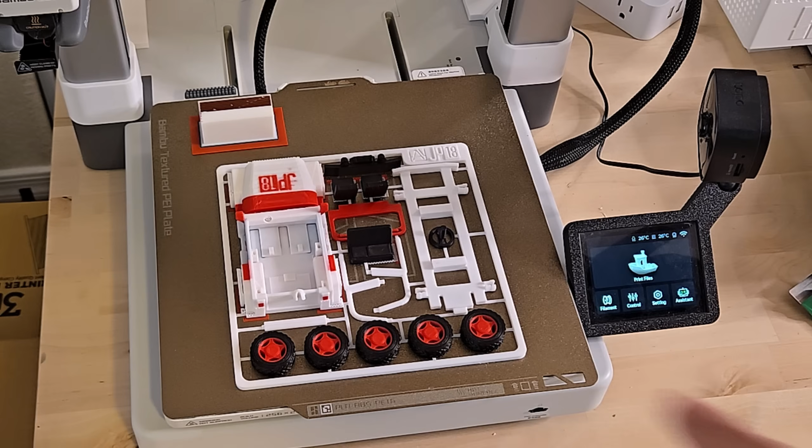My name is Nick, and today we're diving into one of the most exciting aspects of 3D printing: painting your 3D models. Imagine taking your prints to the next level with stunning multicolor designs while uncovering tips and tricks that most tutorials don't even touch on.

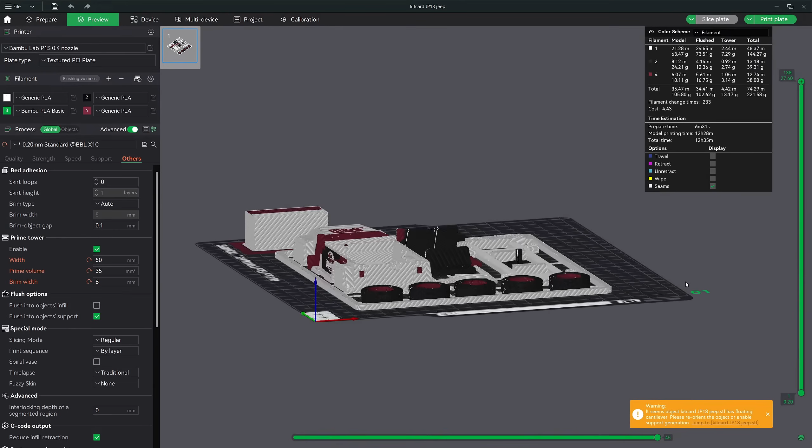This isn't just another tutorial, it's your gateway to mastering the art of 3D painting. I'll guide you step by step from setting up your AMS and syncing your filaments in Bambu Studio to mastering every single painting tool. We'll dive deep into the essentials like prime towers and flushing volumes, exploring how they work together to make more efficient prints. And to wrap it all up, I'll show you how to bring it all to life with a fully painted Jurassic Park Jeep. Whether you're a beginner or looking to sharpen your skills, this video is packed with everything you need to elevate your 3D printing game. So grab a cold one and let's jump in and start painting your next masterpiece.

On the left side of Bambu Studio, you'll find the filament menu. This is your go-to for managing filament. You can add or remove colors, change filament types, and sync AMS colors with Bambu Studio.

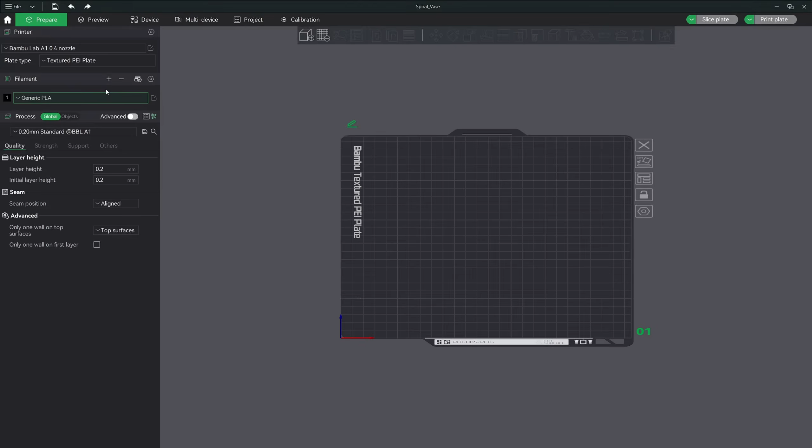Before we dive into this tutorial, let's get the filament loaded into the AMS Lite. For this tutorial, I'm using PLA filaments—they're beginner-friendly and super easy to work with. That said, the AMS can handle other types of filament like PETG and ABS, so you've got plenty of flexibility. But to keep things simple, let's stick with PLA today.

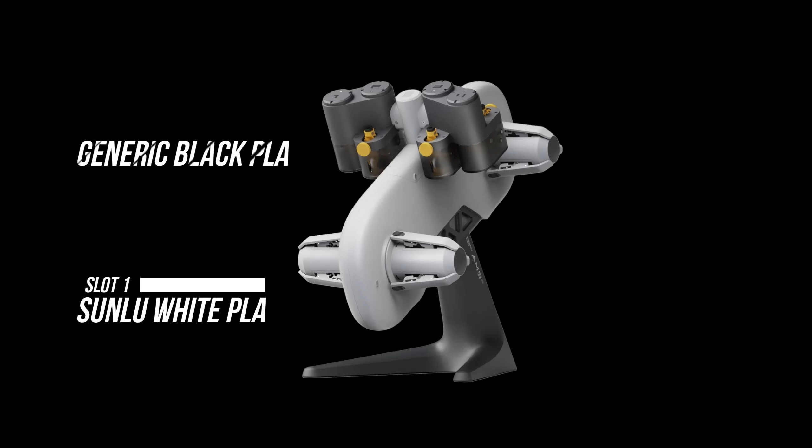Here's what I've loaded into my AMS Lite: Sunlu white PLA, a small generic black spool of PLA, Bambu Lab green PLA, and Sunlu red PLA with the new spool style.

Here's a quick tip: not all spools fit perfectly onto the AMS. For instance, this old Sunlu spool has a different hole size. That's where these spool adapters come in handy—they're easy to print and ensure that the spools fit snugly on the rollers. I'll include a link below so you can print your own.

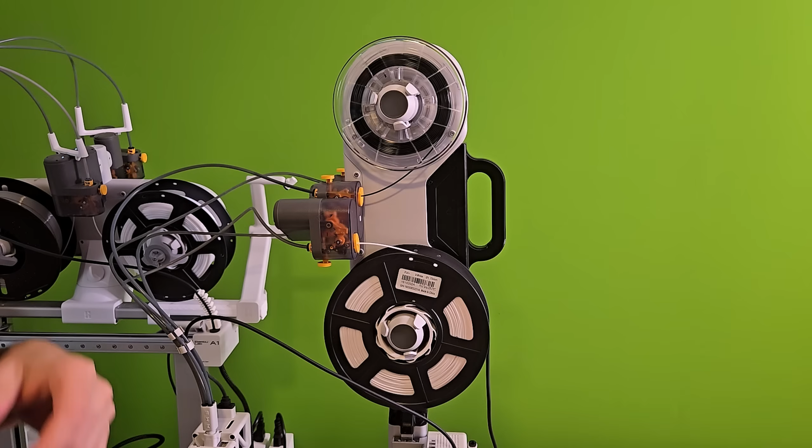Speaking of spools, did you notice the small black PLA I mentioned earlier? Even smaller spools can work with the AMS as long as they fit securely.

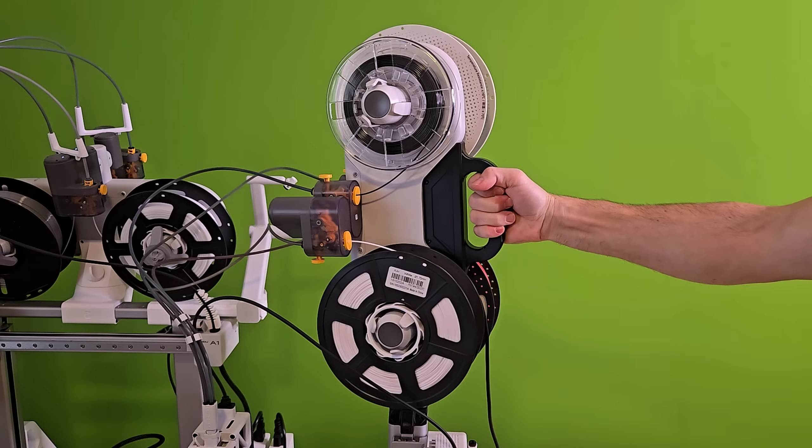Once all the filaments are loaded and properly fed into the AMS, it's time to return to Bambu Studio and set up our filament colors. I'll walk you through matching your filament slots, syncing them with Bambu Studio, and prepping for a flawless multicolor print.

Once we're back in Bambu Studio, let's switch over to the Device tab where we can set up our filaments with the AMS. Over here on the right hand side is where we can manage all of that. Depending on if you have an AMS or an AMS Lite, it will display the colors four across, or for the Lite, it will display them in a 2x2 grid. It also has the extra spool option in case you have that set up.

Now the colors that are set up currently do not match what I just loaded into the AMS, except for the Bambu Lab green PLA. This is because all Bambu Lab filaments have an RFID tag. You can see that the correct color has been loaded, and it displays an eye icon rather than an edit icon, indicating the filament has been recognized by the RFID. You can click on that icon and a pop-up will display the filament name, color, temp, and serial number, making the process for Bambu Lab filaments a much more streamlined experience. Let's move forward and properly set up the rest of our AMS filaments now.

Slot 1 is right here, labeled A1 with a circle icon around it. You can click on that, and if you have Bambu filament loaded but not recognized by the AMS, it will automatically detect the filament information for you. Since we are not using Bambu filament for this slot, we need to manually edit it. Click the little edit icon for slot number 1, and the filament window will pop up. This time we need to manually add our filament information. If you happen to calibrate all of your filaments with your AMS, you should be able to select them from the drop-down menu here.

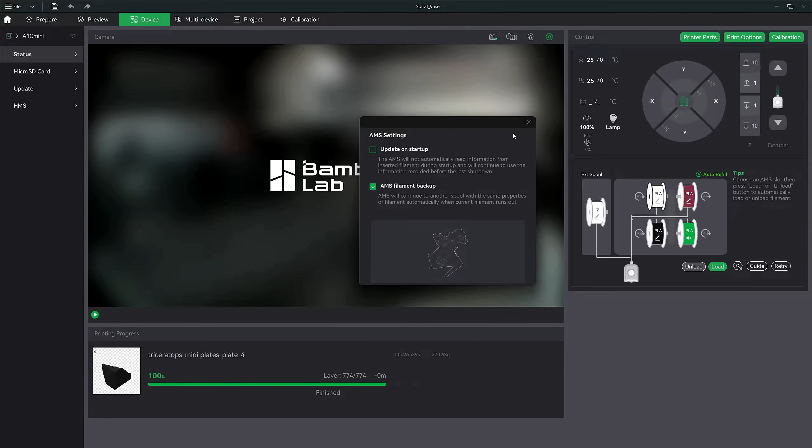Next up is the guide button, which takes you directly to the Bambu wiki page for the AMS. If you're new to the AMS and you want to deep dive into the features, I recommend giving it a quick read when you have time. It's a solid resource. The retry button functions the same as the one on your printer screen during filament loading. If the filament doesn't successfully push through the extruder on the first attempt, you can hit the retry button to give it another shot and force the AMS to push more filament through.

Now that we've covered all the AMS functionality, let's head back to the Prepare tab to finish setting up our filaments. When you click the filament drop-down menu in the Prepare tab, you should now see a new section labeled AMS Filament at the top. This section displays all 4 of our colors with their corresponding A1 through A4 icons from the AMS.

Next, we need to add our filaments to the project, and there are 2 ways to do this. First, you can use this icon button right here, and if you click it, a pop-up will show. Then hit Resync. It will sync these new filaments that you just set up in the Device tab and add them to the filament list.

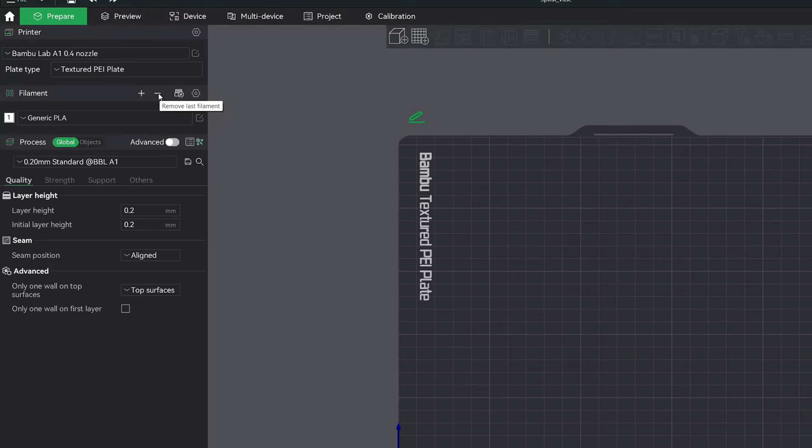The manual way of doing this is if you click the plus button here, you can manually add your loaded filaments by using the drop-down menu and manually selecting a filament. Let me remove the synced filaments first. Now, if I manually add 4 filaments to our project, I can go into each one and select our AMS filaments for each.

Next, let's dive into adjusting filament settings. To do this, click the edit icon right here. A new window will pop up, giving you a variety of options that you can manually adjust for the specific filament. If you have the advanced mode turned on, you'll notice that there's more settings that appear.

Let's quickly turn it on to take a look. As you can see, the advanced mode reveals a lot more customization options. However, for this tutorial, we'll leave the advanced mode turned off. It's not necessary for what we're doing today.

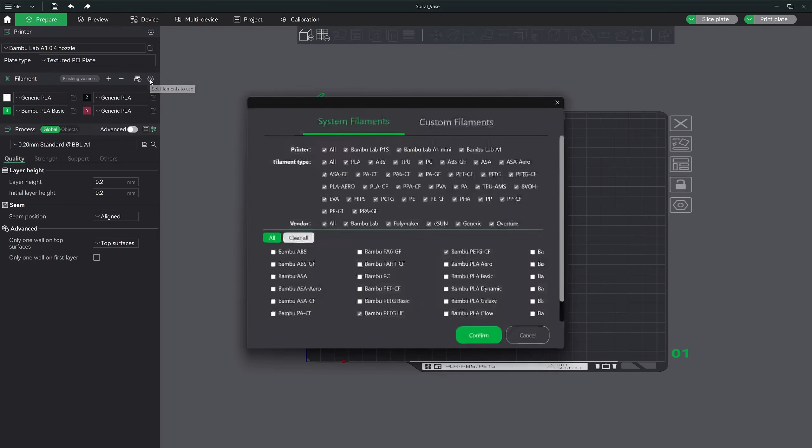Before we move on to the fun stuff, let's touch on the last feature in the filament menu. If you click this gear icon, it will pop up a menu where you can add filament templates built into Bambu Studio. While not every brand is included, you'll find all of Bambu's filaments and many Polymaker filaments available to add here. For now, let's cancel and go back.

Now that we've covered everything, let's go ahead and paint our first model. I went ahead and opened up a few models so that we can go over each of the painting tool features. For our first model, I wanted to dive straight into the fun stuff. We will be painting a JP18 Jurassic Park Jeep. If you've been a longtime supporter of my channel, you know I love printing dinosaur skulls. So I thought this fits the project perfectly.

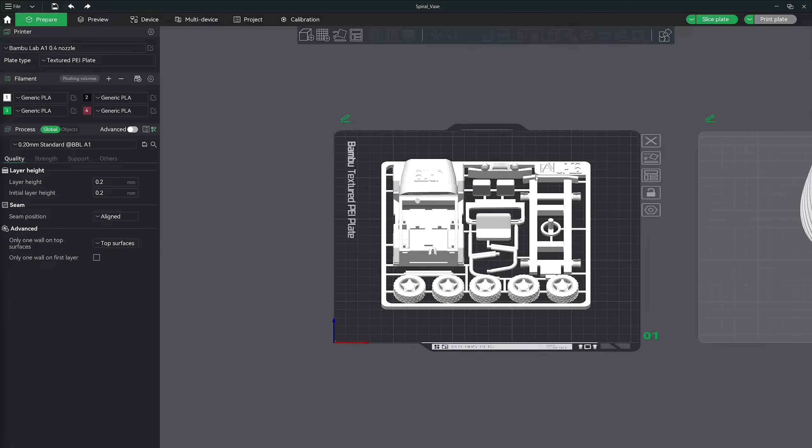To activate the paint tool, you first need to select the model you want to paint. Then you'll notice the toolbar at the top will highlight. This means that you can now use the tools with the currently selected model. Let's go ahead and open the paint tool by selecting this icon here or by pressing N on the keyboard. Once you click on the paint tool, you'll notice everything else in the main window disappeared.

This is because Bambu Studio went into isolation mode. This makes it possible to work with the current model without having other models obstruct your view. Up here at the top, you can see our 4 loaded filaments. To get started painting, you first need to select the color you want to work with. It's like picking your paint with your brush.

You can either use the mouse and select a filament by clicking on it, or by using the number on the keyboard that represents the color. So if I wanted to pick red, all I have to do is hit 4 on the keyboard and it switches. Next are all the different types of painting tools. Each tool works differently from one another.

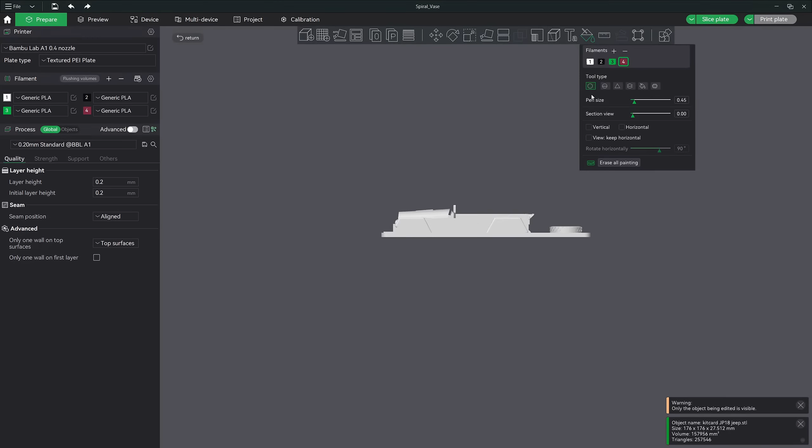First, let me change my view to the side by pressing Ctrl 5. Then I'll zoom in and angle my camera. The 6 painting tools are the circle, sphere, triangle, height range, fill, and gap fill. The circle and sphere both work similarly. The pen size controls how big of a brushstroke you want to make.

You can use the slider widget to adjust it, or if you hold down the Control key and scroll the mouse wheel, you can adjust the pen size without having to use the slider. This is a great time saver if you're making intricate painting adjustments.

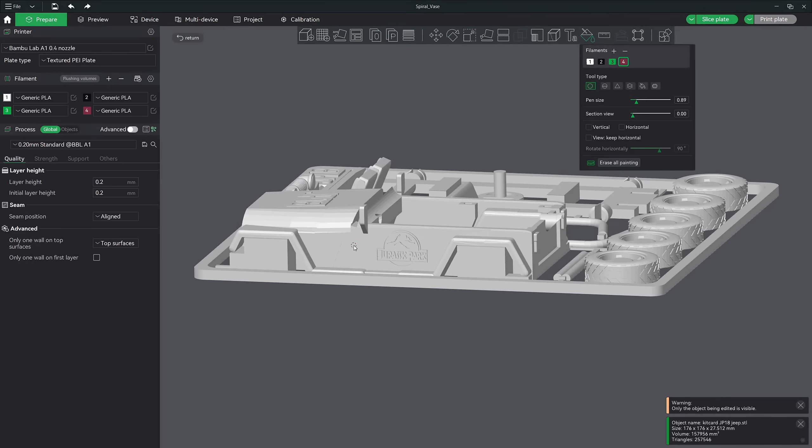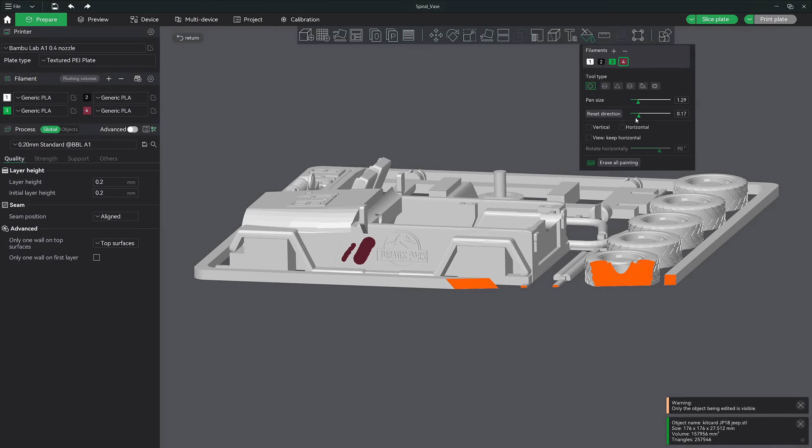The section view allows you to hide sections of your model for more detailed painting. If you're not able to get a good view of what you want to paint, simply adjust the section view to hide parts of your model. This tool also has a slider widget that controls it, but if you want the shortcut for this tool, simply hold down the Alt key on the keyboard and adjust with your mouse wheel.

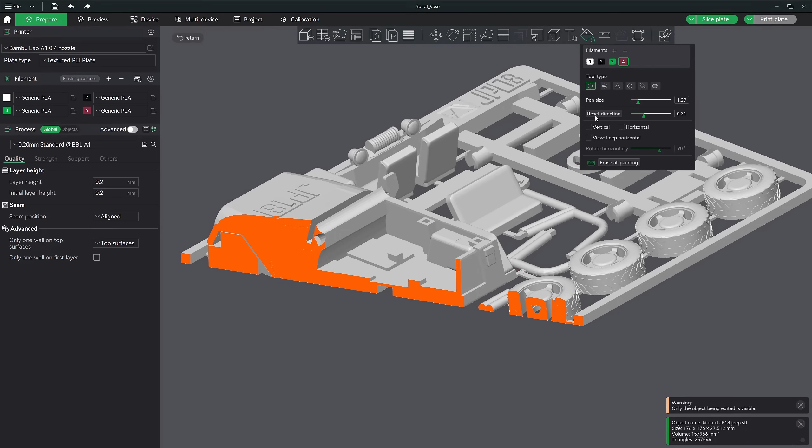Now you'll notice after you adjust the section view, it will change to a button that says Reset Direction. The way the section view works is it will start to remove the model from the direction of the view of the camera. So if you move the camera, it will still continue to remove the model from the same angle. If you hit the Reset Direction button, now it will change the angle at which the model gets removed.

Just below the Reset Direction are the vertical and horizontal checkboxes. This will lock the paint tool to only paint in those specific directions. If you want to paint a horizontal line on your model, check this box, and now if you paint, you can see my line is making a completely straight line on the horizontal axis.

The same goes for the vertical. If I check that box, now the paint tool will only paint in the vertical direction. Again, this is all relevant to the camera view. So if you want this to apply in the correct direction, then check the Keep Horizontal checkbox.

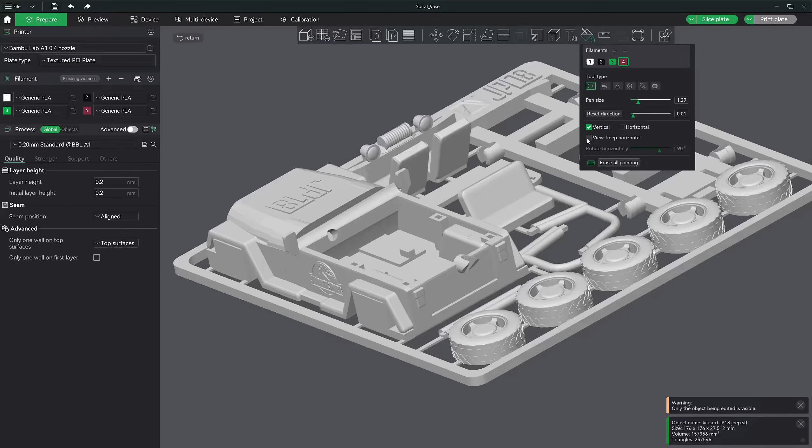I'll admit, I rarely use these tools on my models. I don't own a proper tablet or a digital pen tool to make this kind of painting fun. Using a mouse to paint isn't the best, of course. I'm sure there are amazing artists with pen tablets that would enjoy freehand painting on models though. Last in the menu is Erase All Painting, and that just removes any paint that's been applied to your model.

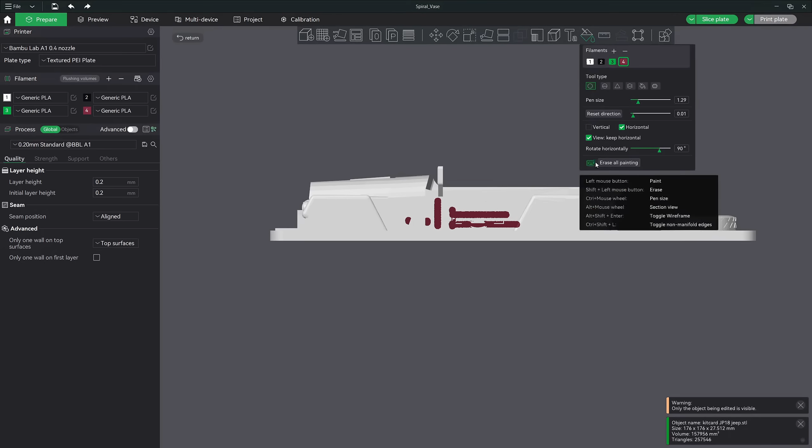The sphere tool almost works exactly the same way as the circle tool, except it paints in a 3D area instead of a flat surface area like the circle tool. All the settings work just the same as the circle tool.

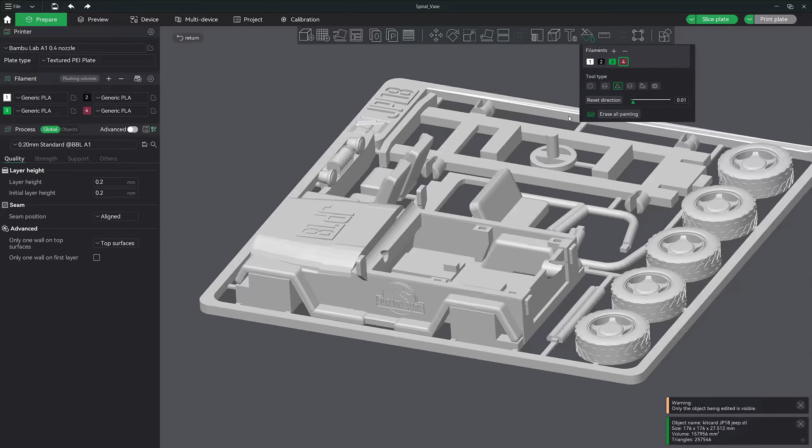The triangle tool finds triangle surface geometry that your model is designed from. It allows you to paint those individually. If we take a look at the side of the Jeep, for example, all of the triangles that make up this side will highlight and you can paint them individually. See how I was able to paint the entire door pretty quickly?

This tool can come in handy when you need more flexibility for painting a section of your model, and the fill tool isn't allowing this. This will make more sense in a minute. Next, let's skip over the height range tool and select the fill tool. Both the triangle tool and the fill tool work very similarly. When painting a model, you'll use the fill tool more than any other tools.

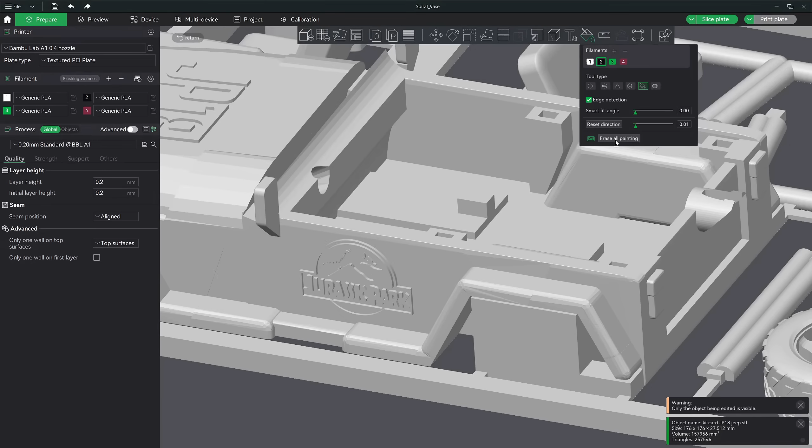Now, if I erase all the painting on the model, I'll show you how powerful this tool is. With one click, I was able to fill the entire door. Now, can you see the difference between the fill tool and the triangle tool? The triangle tool can accomplish the same task, but with a little more control. However, the fill tool has the ability to adjust its fill control. Let's go ahead and skip over the edge detection checkbox for a minute.

The Smart Fill angle slider can be adjusted using the slider widget with your mouse. The shortcut for it is Control on the keyboard and the mouse wheel. What the Smart Fill angle slider does is it allows your fill to fill in more than just one section at a time. It will begin to start highlighting adjacent surfaces that are connected to the surface of your model.

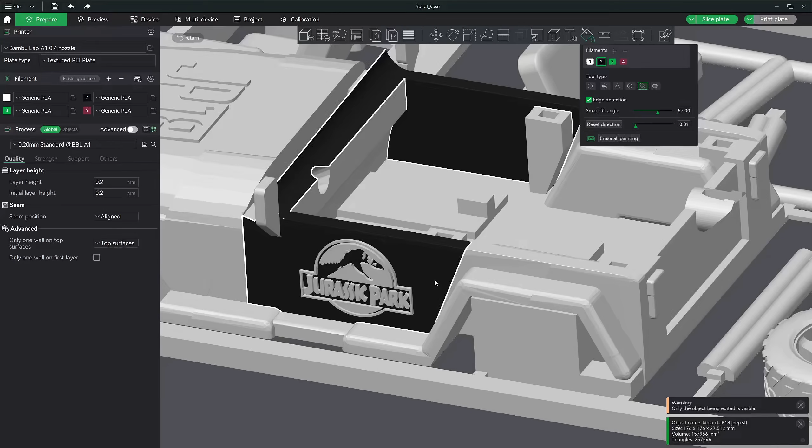As you can see, if I adjust the Smart Fill to say 57 and then click on the door again, it now paints the entire door, the dash, and the door on the other side of the Jeep. This is how we can get more flexibility and control over our fills. Remember, the lower the Smart Fill angle, the more control you have over your fill. The higher the number, the less control. This is why I use the fill tool more than any other tool.

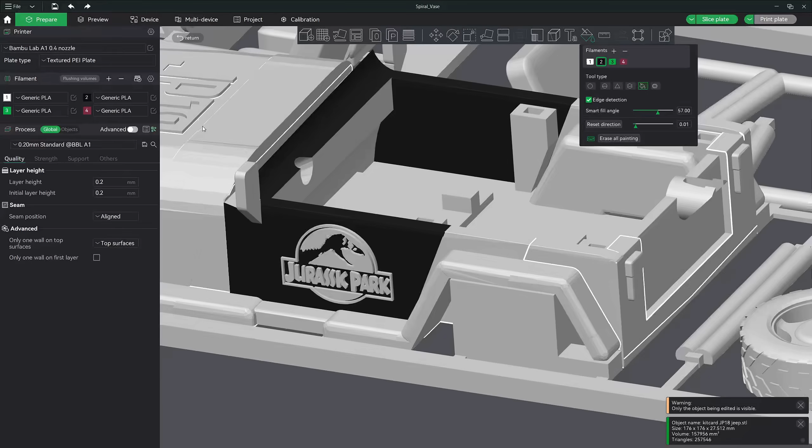Now going back to the edge detection checkbox, this tool will identify hard edges on your surface models by highlighting its boundaries. As you can see, if I uncheck this and paint, much larger sections of the model get painted. You also no longer see the edges of your surfaces highlight. This is great if you want to paint an entire section of your model a specific color without having to click on individual surfaces.

Here's a tip. When painting with this feature, you can fill in a specific section of the model, then surfaces that are surrounded by your fill can be painted completely by turning off edge detection. This is because paint won't apply over already painted surfaces. It uses the already painted area as a border.

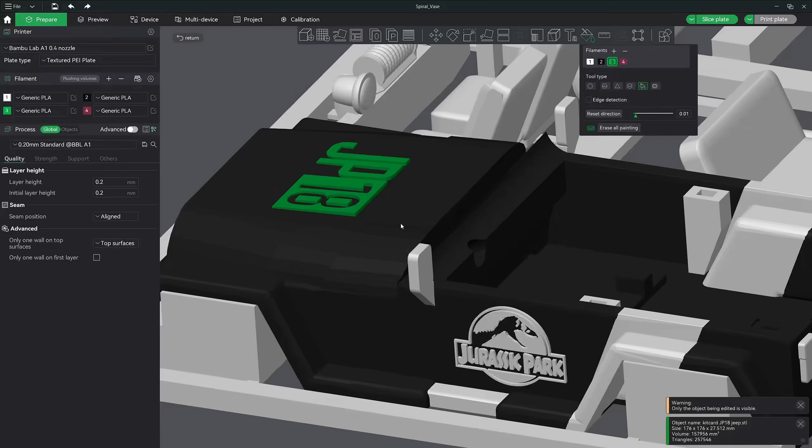The height range tool is not going to work very well for the Jeep model, so that's why I have this vase model here. Let's go ahead and switch over to that now. Select a vase and open up the paint tool and select the height range tool. If I zoom in and adjust our height range,

you can see that the horizontal lines are much farther apart. What this tool does is paint a horizontal line all the way around your model. So if we wanted to paint a few different colored sections of our vase, it would look like this.

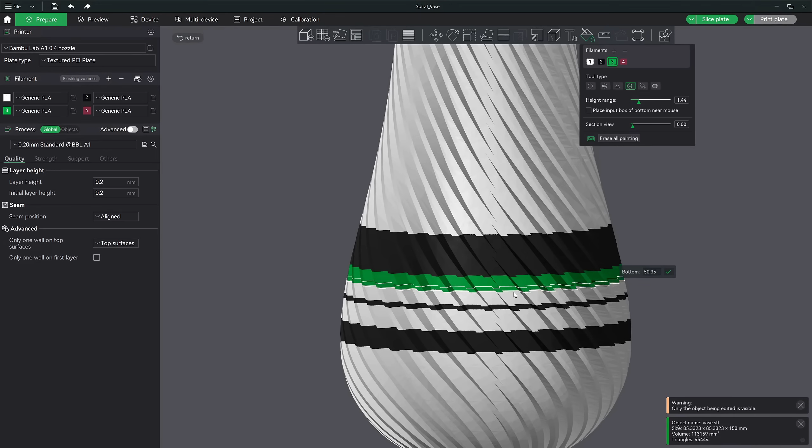Now obviously you will never paint your vase like this because it's just ugly. But you can see how this tool could be very useful if you wanted to paint a horizontal section in a specific color. This tool is perfect for that job.

The feature Place Input Box of Bottom Near Mouse will move the pop-up box that indicates how far from the bottom of the model near the mouse. This allows you to use the input height and manually type in how high up you want the height range to paint a line. Type your value and click on the green checkbox to paint. If you have issues with the pop-up position, drag your mouse from below the model and up and it will reset it near the mouse.

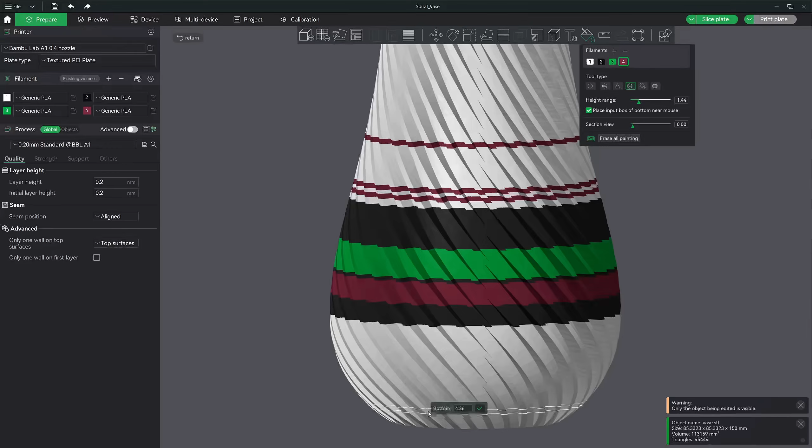There may come a time when you're using the fill tool and you're unable to fill an area between the model, causing a gap in your colors. This is going to cause you additional filament changes and waste. What the gap fill tool does is allow you to fill in those spaces between the two colors, eliminating the color changes. I painted the front portion of the hood and the fender with the fill tool to demonstrate this.

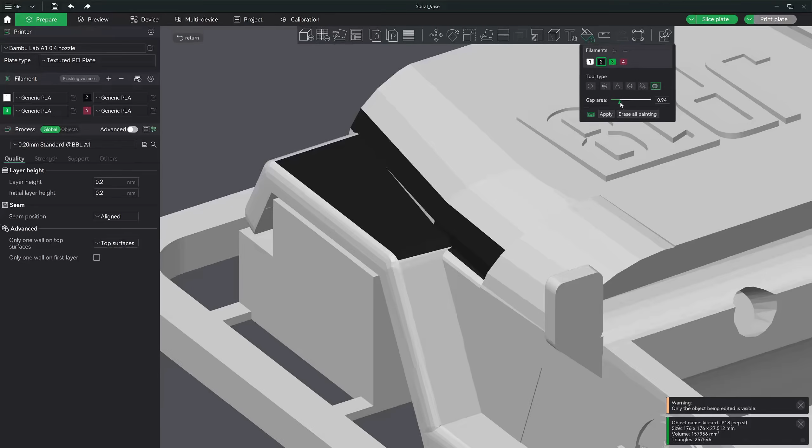You can see the small sliver of triangle was missed, giving us a gap in color. If I use the gap tool and move the slider, you can see it fills the gap for me. There are many other examples of this, but I think you're now aware of what it accomplishes. Alright, I think I've covered all the paint tools and different uses for each of them. Let's go ahead and dive into everything about prime towers and flushing volumes.

Let's quickly go over the flushing volume since we skipped over it earlier. The settings are located in the filament menu right here. When your printer switches from one filament to another, it needs to clean out the nozzle to prevent any leftover filament from mixing into the next layer. This cleaning process is called flushing, and the amount of filament used during the process is known as the flushing volume. Flushing volume is all about balance.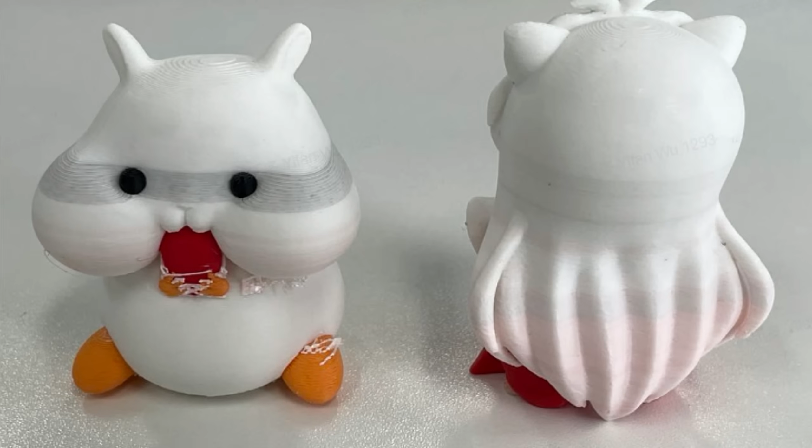If the volume is too low, remnants from a previous filament can contaminate the next layer, causing color bleeding or material issues. On the other hand, if the flushing volume is too high, you're wasting filament and increasing your print time unnecessarily. That's why getting it just right is so important. Bambu Studio automatically calculates these necessary flushing volumes based on the filaments you're using. For example, if you're switching from a dark color to a light one, the software will increase the flushing volume to ensure a clean transition.

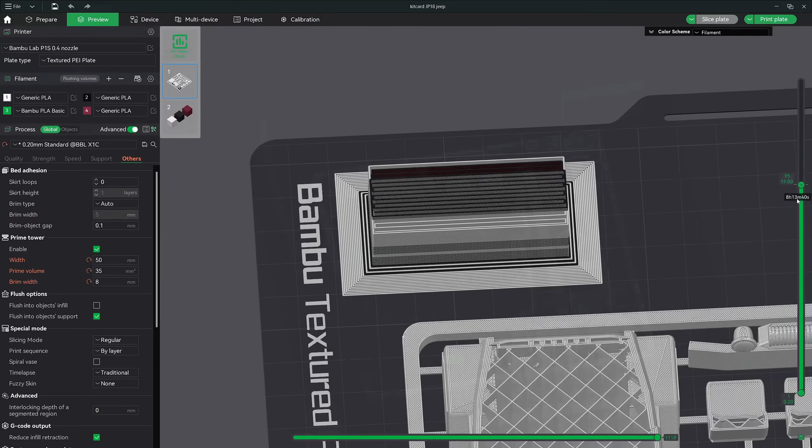The flushing volumes directly correlate with the prime towers in Bambu Studio. As a printer transitions between colors or materials, the prime tower is where the flushing takes place to ensure your model remains clean and precise. The flushing algorithm in Bambu Studio has been improved significantly over the last year, reducing waste while maintaining excellent color transitions. While you can manually adjust the flushing volumes for individual colors or all colors at once using the multiplier field, it's rarely needed thanks to Bambu Studio's advanced and effective calculations. This makes multicolor 3D printing not only accurate but also more cost-effective, and very easy and simple for non-technical users.

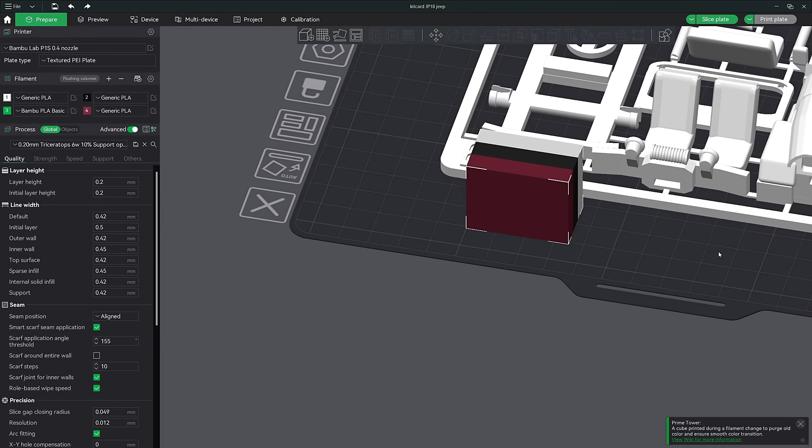Now that we've covered flushing volumes, let's go ahead and dive into the prime towers to see how they tie everything together. Prime towers are exactly what they sound like, small towers printed alongside your model. Their job is to act as a purging station, clearing out any leftover filament from the nozzle before switching to a new color or material. Think of it like rinsing out our paintbrush before changing colors. This step is crucial for avoiding streaks, blobs, or color contamination on your print.

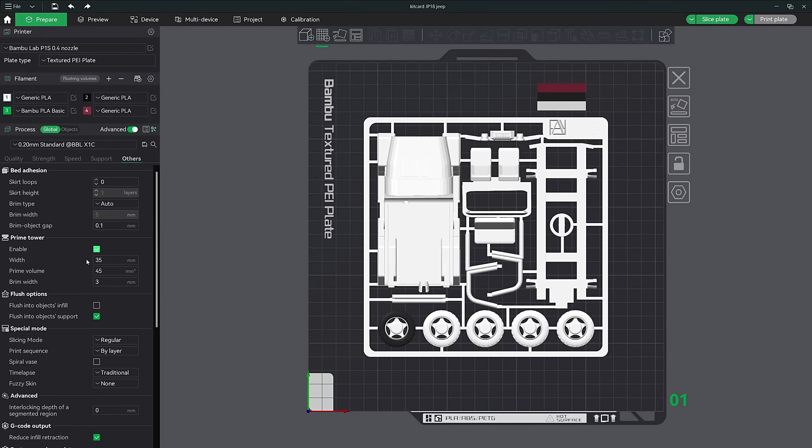Usually prime towers are enabled by default, however, if they happen to not be enabled, you can easily activate them. Head over to the Others tab in the slicing settings, and you'll see a checkbox to enable them. Once you check the box, Bambu Studio will automatically position the tower on your build plate. Now these are the 3 key settings to adjust when using prime towers. Number 1, the width. This determines the size of the tower's base. A wider base provides more stability, especially for taller prints. Number 2, prime volume. This controls how much filament is purged during the color change to ensure clean transitions.

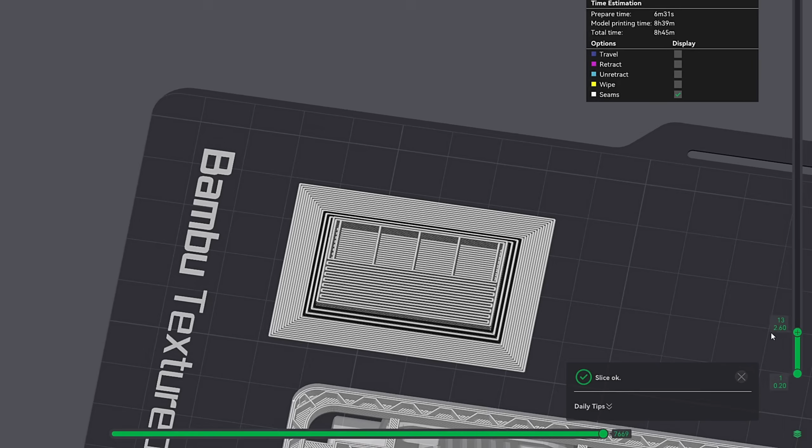Number 3, brim width. If advanced mode is turned on, you'll see an additional setting for brim width. Adding a brim anchors the tower more securely to the build plate, which is helpful for taller and more complex prints. Let's break these settings down a little bit more, starting with the prime volume.

The prime volume is crucial for ensuring clean filament transitions. It controls how much filament the printer purges during color change. If the value is set too low, you might see streaks or leftover filament from the previous color. On the flip side, setting it too high can lead to wasted filament.

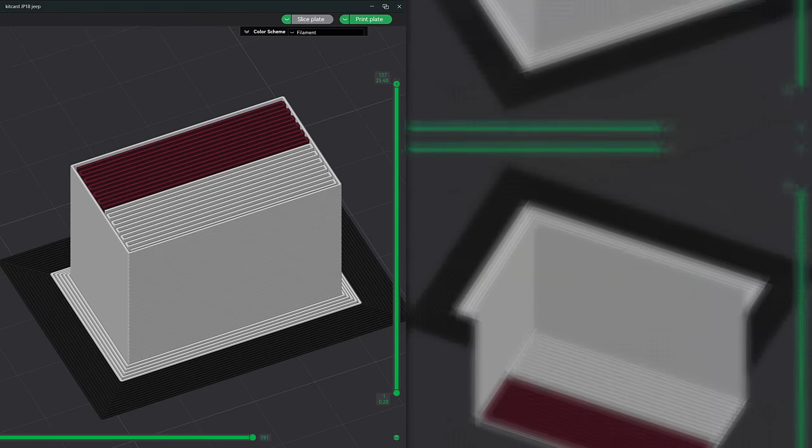Start with the default value in Bambu Studio and adjust based off of your filament type. For example, PLA usually requires less prime volume, while materials like PETG or silk finishes may need more for smooth transitions. If you're unsure, start small and gradually fine-tune with test prints.

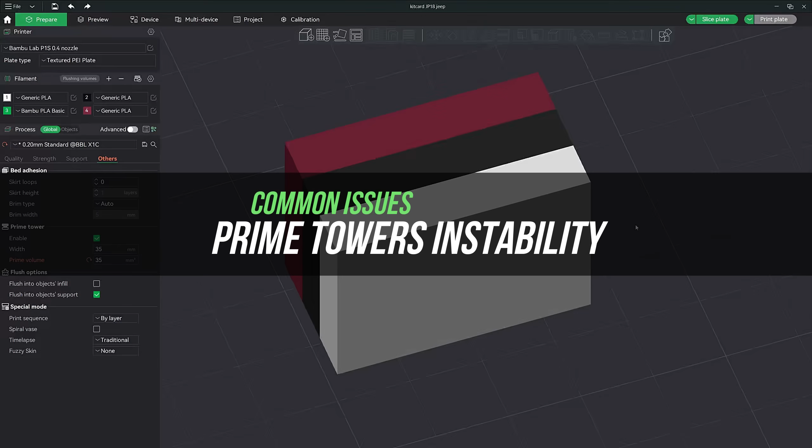Let's talk about a few common issues and how to fix them. Sometimes things don't go perfectly with prime towers. Number 1, tower instability. If the tower wobbles or falls over, try increasing the width setting, giving it a more stable base. For taller prints, turn on advanced mode and add a brim width. This creates a support ring around the tower, anchoring it to the build plate.

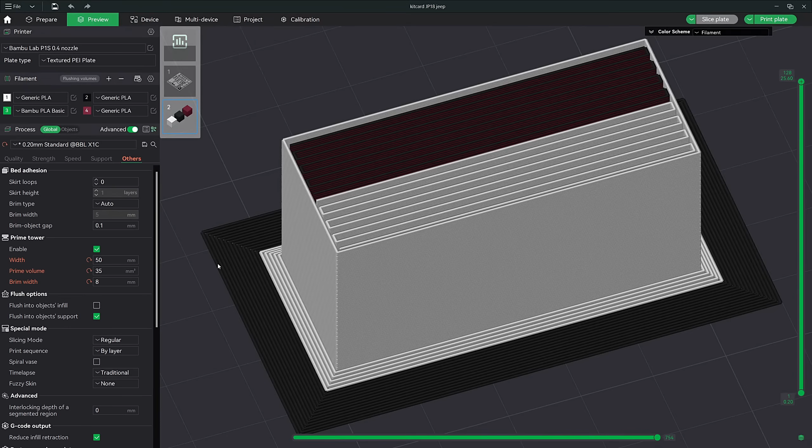For short prints, use the default brim of 3. Once you get taller prints like a helmet, for example, try a brim width of 8 or so. I would much rather waste a little bit of brim filament than have a failed prime tower at 95% of a print. Number 2, filament wastage.

If you feel like your tower is using too much filament, try reducing the prime volume. Test with smaller prints to find the right balance between clean transitions and minimal waste. Number 3, tower placement. Bambu Studio automatically places a tower in an optimal spot, but if it's too close to your model or causing nozzle travel issues, you can manually move it to a better location. Just keep it far enough to avoid contact with your print, but close enough to reduce travel time.

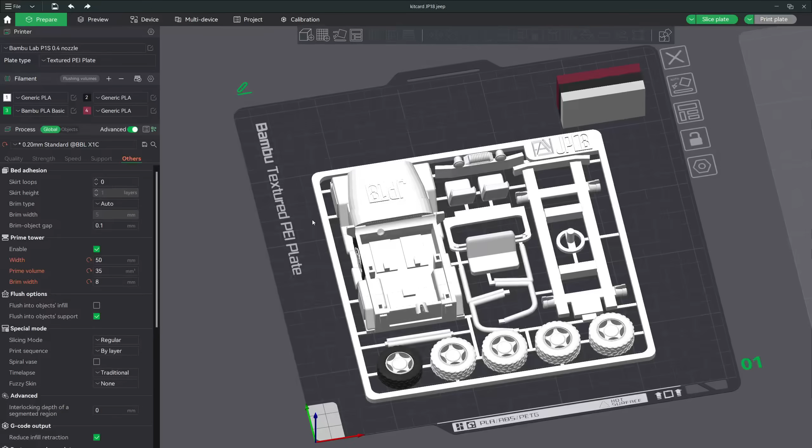Alright, there you have it. Prime towers may seem like a small feature, but they make a huge difference when printing with multiple colors. With these tips, you'll be able to fine-tune your prints and get flawless transitions every time.

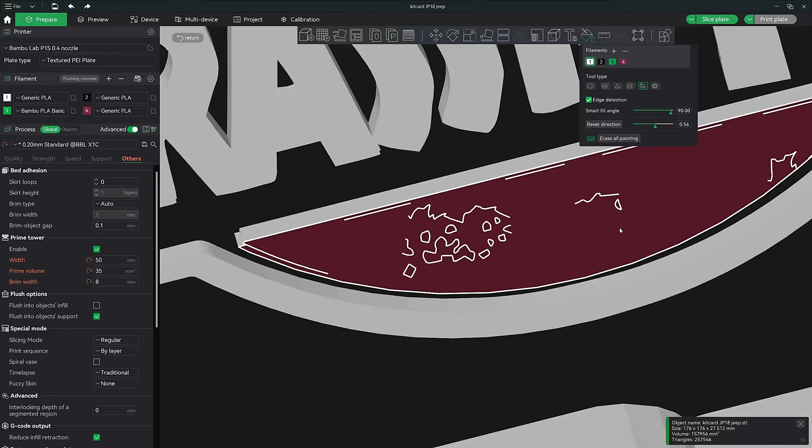Let's go ahead and finish off the last part of this tutorial with painting our Jurassic Park Jeep. I'll fast forward this section into a time lapse so that you can see the end result. I'm not shooting to replicate the paint job from the movie, but plan to use it as a guide. I will most likely drop the green color in my painting because the Jeep doesn't have any green. Other than that, I think it's going to turn out pretty awesome.

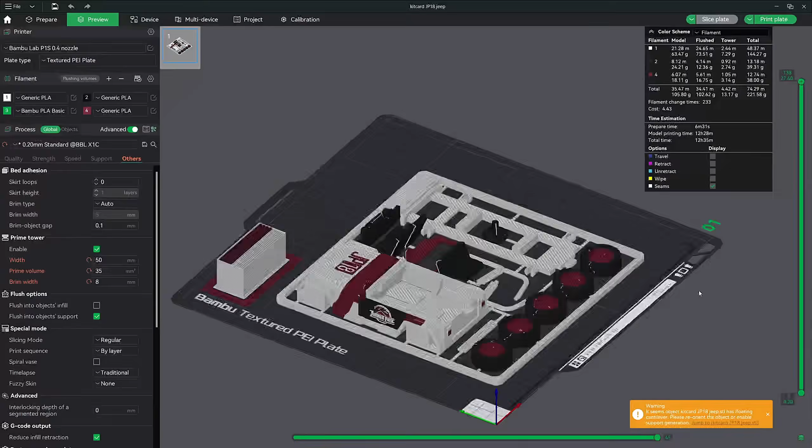Alright, now that the paint job is complete, let's take a look at the print time. First, let's go ahead and slice our model. In the filament overview, we can see there will be a total of 233 filament changes. Our print time is 13 hours and 21 minutes, and the total waste is going to be 97.14 grams. And the total filament for the model is going to be 220.32 grams.

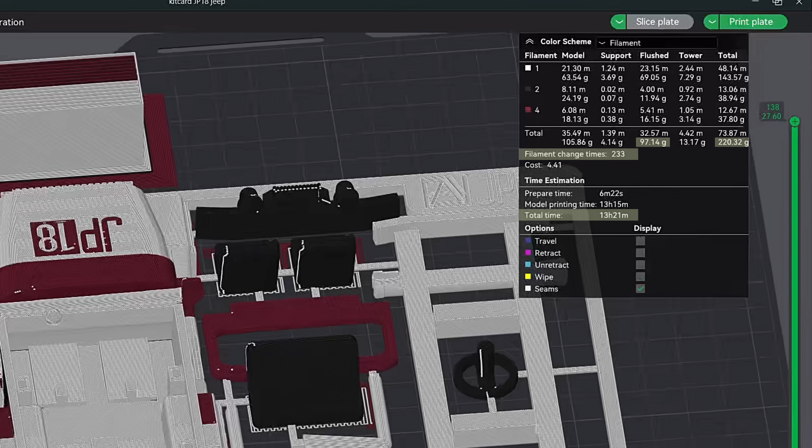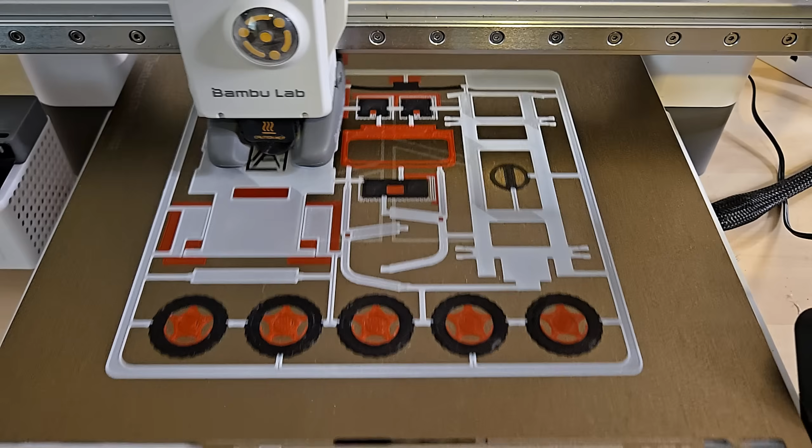That makes a whopping 44% of our print going to filament swaps. Unfortunately, this is the cost of printing multicolors, but once the Jeep is done, it's going to be totally worth the wait and filament. By now, you should feel confident navigating Bambu Studio's painting tools and ready to tackle your next multicolor 3D printing project. Remember, the key to mastering multicolor printing lies in the practice and experimentation. Don't be afraid to try different settings, refine your workflow, and most importantly, just have fun.